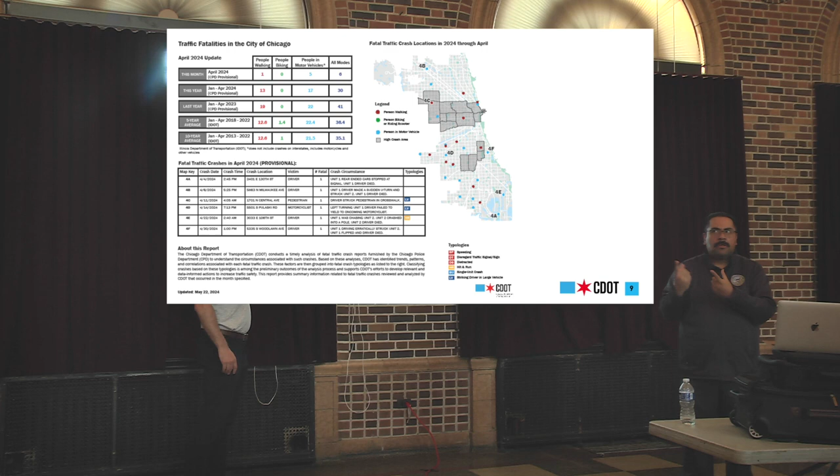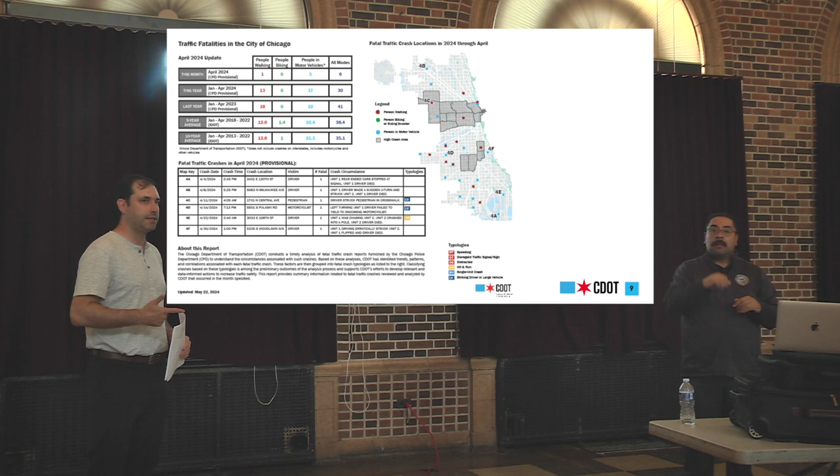This is something that, if you guys are interested, we post on a monthly basis. It's a recap of traffic fatalities around the city, mapping out where they're occurring, a brief description of what occurred in the crash, and then we assign these common crash typologies that we're seeing. So speeding being a huge one, disobeying traffic signals and stop signs, reckless driving, large vehicles is something we're watching very closely for a number of reasons.

So this information is posted monthly and I would encourage people to check it out. It's a really good resource.

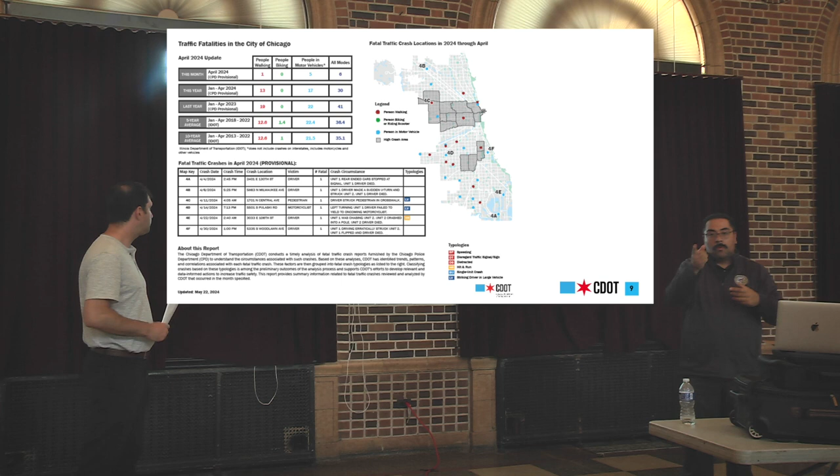Let's talk about a couple of projects. There's a really exciting project with CDOT, the community, and Alderwoman Scott on Independence Boulevard to install a new pathway system. The pathway is in place, basically around Polk and Taylor right now, and it's going to continue to be extended with additional landscaping and everything, but it's really an effort to activate the boulevard system, which is such a great asset within the community.

The Douglas Boulevard side has a really nice walking path that people can hang out on and enjoy, so that'll extend the path on Independence going north. And again, as I mentioned, that really complements and highlights the protected bike lanes that we installed on the boulevard system over the last couple of years.

So just a couple of photos. This is, like I said, between roughly Polk and Taylor right now, but this construction is going to continue on throughout the year.

Speaking of the boulevard system too, I'll plug our friend and partner Jonathan Kelly from the Lawndale Pop-Up Spot, who has done a really great job organizing community events and street closures on Douglas Boulevard. We've worked together with Alderwoman Scott to close down several blocks of Douglas Boulevard to car traffic and open it up to people to come out and celebrate.

This occurs - I know there was one last weekend, which sounds like it was really successful. There's going to be another 5 or so over the course of this summer. We're partnering together to close down the street to car traffic. This is occurring on Douglas between Central Park and Lawndale, in front of Stone Temple Church, and there's a lot of great community programming. If you're interested, talk to Jonathan in the blue shirt for all the dates.

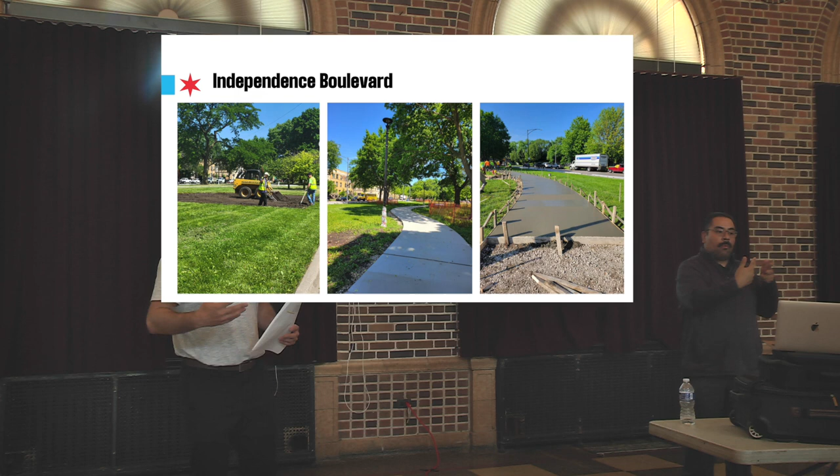I can't remember them offhand, but there's another 5 or so coming up. We've been doing this the last couple of years, and it's been incredibly successful - a great opportunity for people to come out and experience what our streets can be when not focused purely on moving automobile traffic, but really designed for people to enjoy the largest asset in the city, which is our public space.

The next one, Damen Green Line. This is under construction. I don't know the exact timing of when this is going to be completed, but this is a major rail transit project with a new station close to the United Center.

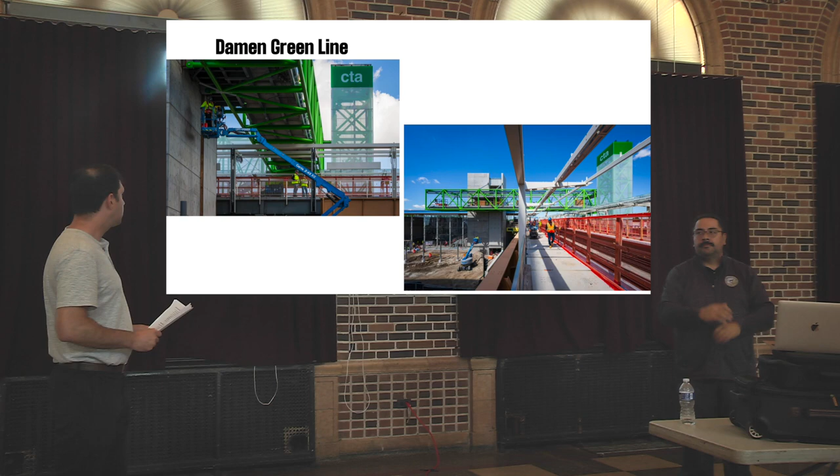Highlighting a really cool project that some of you may have heard about or been following: Chicago and Halsted is getting reconstructed starting later this year, early next year. We had a public information meeting last week where we presented a revised design that incorporated a lot of really cool elements, including dedicated transit lanes on Chicago Avenue through the Halsted intersection, to the east and west, linking up with existing bus lanes.

Also including some really nice bike improvements on Halsted, which I'll get to in a second. But in advance of that project, we actually started striping new dedicated transit lanes on Chicago, both east and west of Halsted, in the last couple of weeks. That work is ongoing and it'll finish up in the next couple of weeks.

Additionally, between Sangamon and Larrabee, right around Halsted, we're also in process, or just wrapping up, between Western and Grand in Humboldt Park. That'll extend the existing bus lanes from Ashland to Western, and continue going west to Grand. So basically from Grand to Michigan, we have some sort of dedicated transit lane - about 4 miles the whole way.

There's one exception, one gap between Ashland and Milwaukee, which we're working on and looking at in partnership with CTA, looking at that closely. That'll be coming along soon, but it's very exciting to see the Chicago Avenue corridor, which is a really important transit corridor for many people and communities, really making a lot of progress. We're very excited about that.

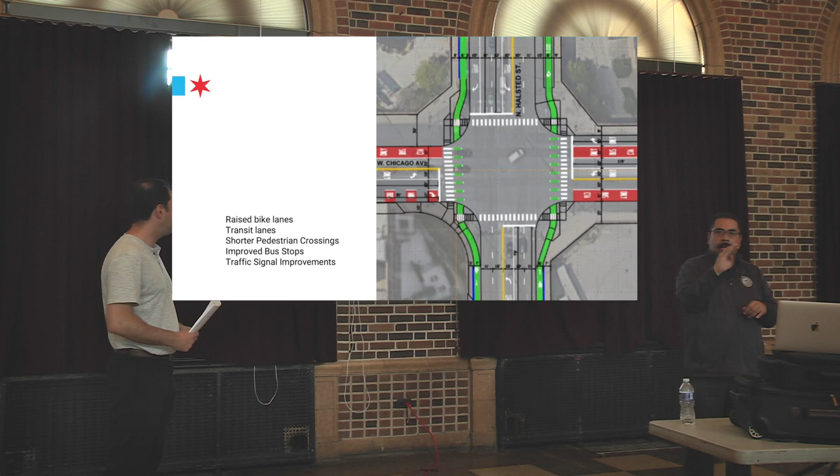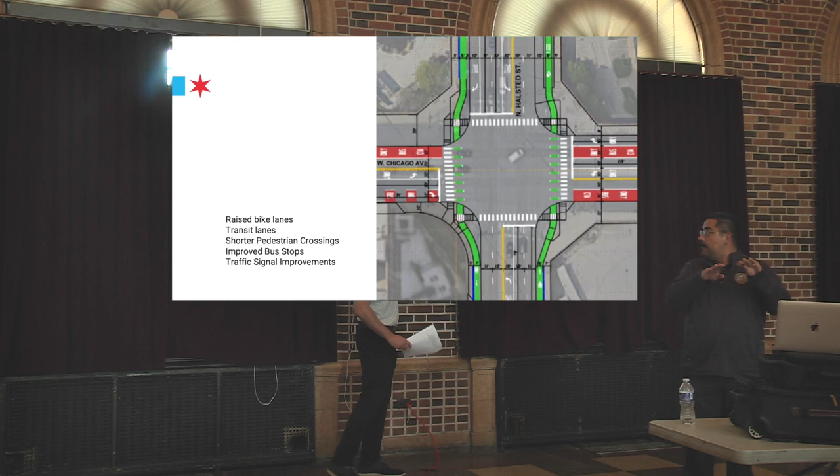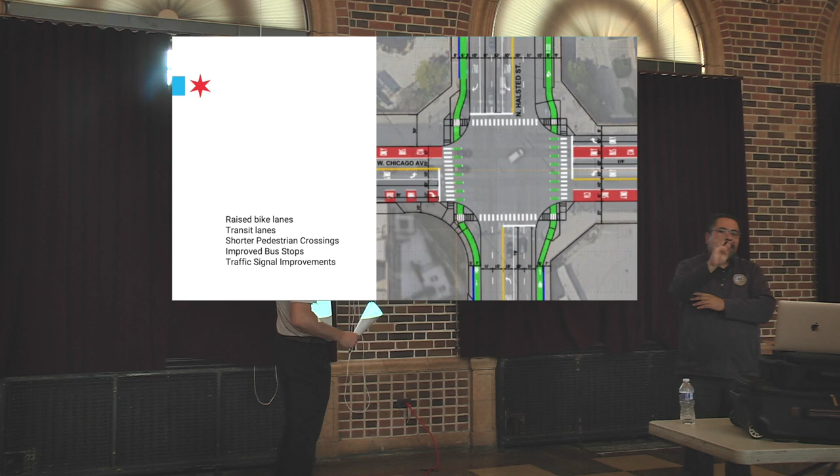At the intersection itself, the corners - it's a little hard to see here in the background, but these black lines will be the new design of the corners with the project. Here is the existing curb line on this intersection as an example. We're really shrinking the intersection, shortening the crossing distance for a pedestrian by 30 to 40%, slowing down right and left turns, which will make the intersection safer and more comfortable for everyone. I think the changing of the curb lines and shrinking of the intersection is really a huge benefit, particularly for people walking.

In addition to the elevated bike lanes, we've got some nice bus stops on Halsted - priority bus stops, where the bus stops in the travel lane.

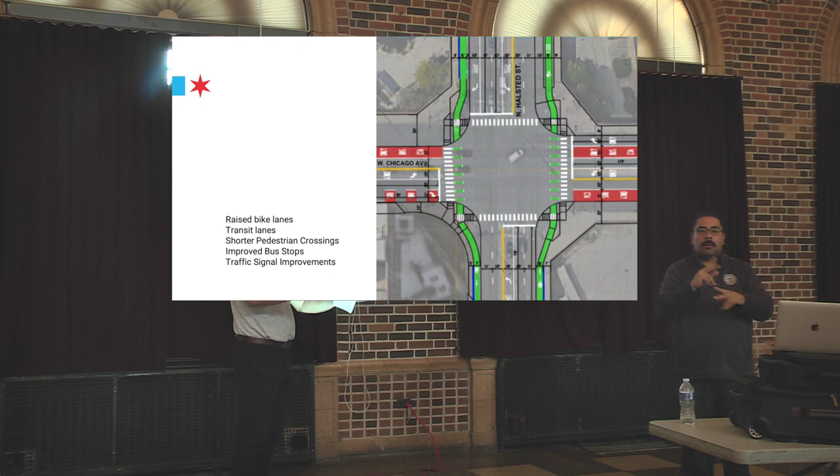The bike lane will be routed behind the bus stop, so there's no conflict from the bus pulling into the bike lane. Pedestrians have the sidewalk space, bike space, and then there'll be a space to get on and off the bus. This will make it easier for the bus to deploy the ramp, get people on and off who are in a wheelchair, stroller, that kind of thing.

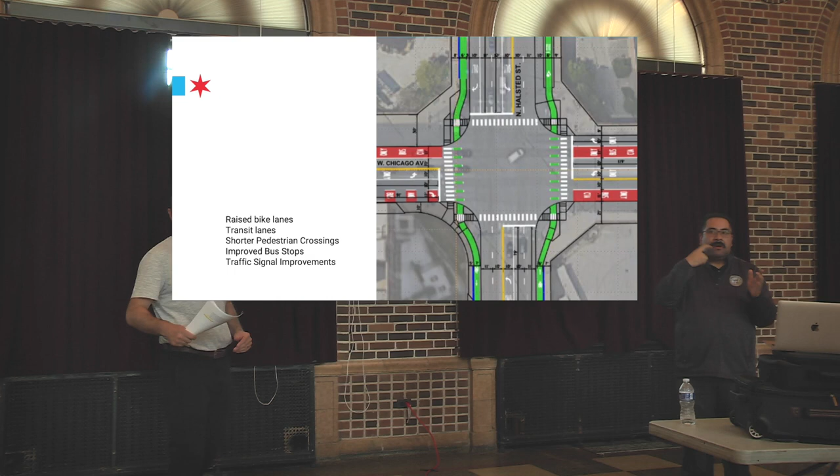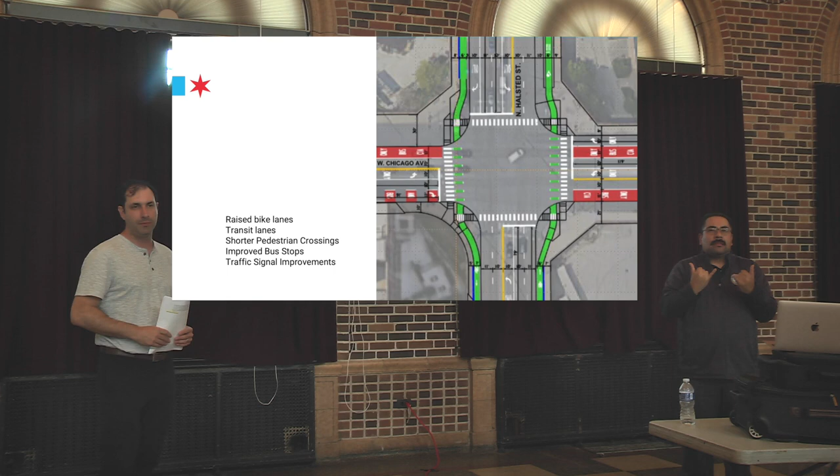So this is a very exciting project. It's been a long project. I definitely see a few faces here who have been very involved in the meetings, and really appreciate the partnership on this. Very excited where this is going. There'll be more info coming up over the course of the summer, but I think this is going to start late this year, more likely early next year in terms of construction.

I mentioned in the beginning some of the work we've done here in North Lawndale, but other communities as well, also South Lawndale, Little Village area, this neighborhood bike network process and strategy where we're working hand in hand with the community and sort of working backwards. Really the last thing we start talking about are streets. The first thing we start talking about is what's the perception, what's the culture around transportation, what are the barriers, what are the opportunities within the neighborhood, both physical barriers like a viaduct or sort of invisible barriers where really the only types of things that you would know are if you really are ingrained in the community and if you live here. We've really seen a lot of success with that effort.

The goal is to expand the tent, bring in people who are working on issues of public health, mental health, youth engagement, local businesses, economic development, sustainability, public safety, and really talk about and better understand the connection and relationship between biking, walking, transit, safe streets, and all these really important quality of life issues that are top of mind for people. When we talk about a protected bike lane or shortening the crossing distance at an intersection, it's not just about providing a couple feet of space for somebody to ride a bike or to get across the street, but it's about creating a community that is welcoming to everybody and achieving a larger set of goals.

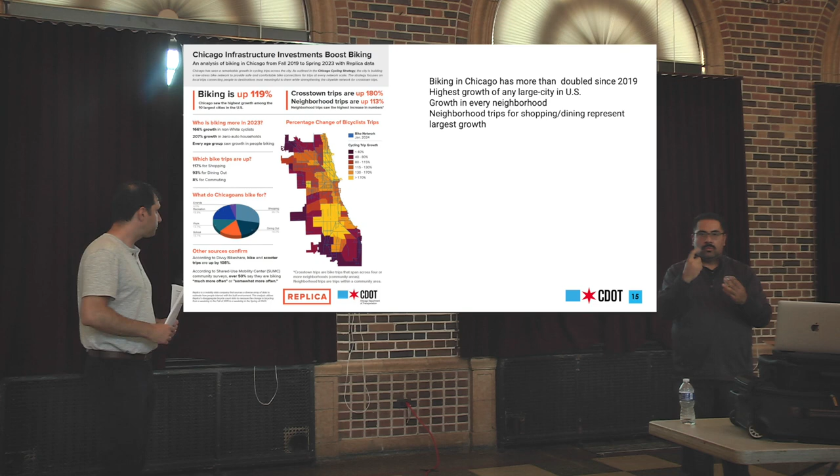So there's a really nice alignment between the strategy, partnerships, and the results we're seeing. The next slide shows a map for our neighborhood bike network process. We started this in North Lawndale, moved south into South Lawndale, Little Village, across Ogden, which Vanessa and Cody will talk about in a minute.

We've had a ton of really good installations in South Lawndale as well, with a few more planned and underway. We've continued that work across the Shipping Canal to the south in Brighton Park, McKinley Park, and Gage Park. Over the last 9 months to a year, we've worked closely with community partners in those neighborhoods to plan out the cycling network, and we have some very exciting installations we'll be announcing soon.

While I'm looking at this map, I'll also mention here in the 24th Ward, Saucedo Elementary School on 24th Boulevard, between Marshall and California—a very big elementary school with lots of kids walking to it. We worked with Alderwoman Scott and the principal of the school, and have some very exciting pedestrian and bike improvements happening. That's just getting started now.

We'll have raised crosswalks, pedestrian islands, and curb protected bike lanes. That's all under construction right now, just getting started. But it's a great improvement for the community and ties into a larger theme at CDOT that we're really focused on, which is improving accessibility and traffic safety around schools and parks.

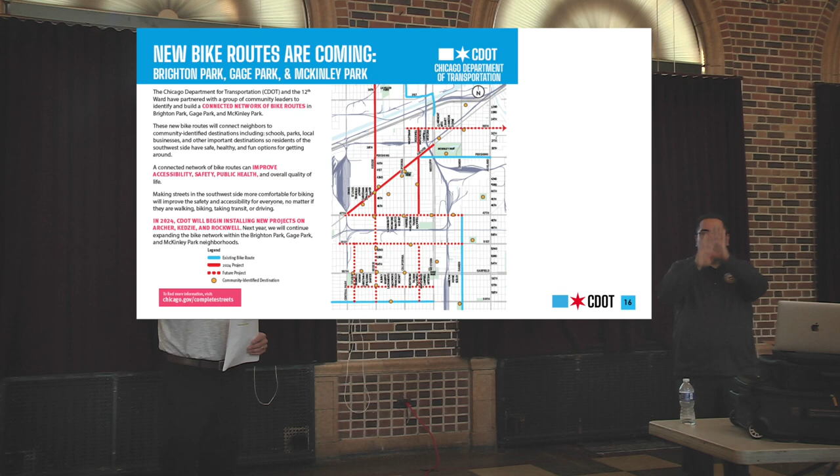We're doing that all over the city. We've got a lot of really cool improvements happening around Portage Park Elementary and Portage Park, including some raised crossings and pedestrian improvements. Nash Elementary in the West Garfield, Austin neighborhood off of Cicero, around Cicero and Erie. So that's a program we're continuing to develop, but schools and parks is really a focus of where we're going in the future.

Okay, next—I think this is my last slide, and there's so many updates and exciting things I want to share that I'm way over time. But if you have questions or want to chat, just grab me, I'll be here the whole time. There's just so many really cool projects and initiatives happening all across the city.

This is a couple of photos, this is Clark Street in the River North neighborhood downtown. We've got a protected bike lane under construction, plus pedestrian improvements, from Oak down to Grand right now—that's basically where Clark Street converts to a one-way street southbound. This is under construction as we speak: curb protected bike lanes, pedestrian refuge space, bike signals at some intersections. This should be completed in the next month or so, and will serve as a couplet to the Dearborn protected bike lane, which goes northbound north of Kinzie.

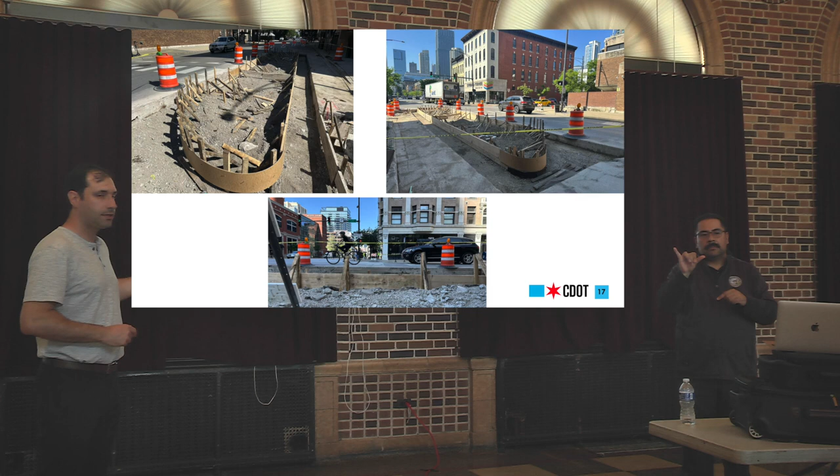So I think that's all. Again, thank you for being here. Look forward to the conversations at the tables, but really appreciate the partnerships with everyone. I think that's been really a key to the success we've been having and will continue to have in the coming years. So thank you.

Hi, good evening. How's everyone doing? Nice to see so many familiar faces. Hi, I know some of you. My name is Vanessa Irizarry.

I'm the project manager for the Ogden Avenue Corridor Improvements Project. My tendency is to lower my voice as we speak, so if you don't hear me, please let me know and I'll try to project better. I'm here with the managing project engineer, Cody Machen, from CDOT as well. We were asked to come here, so thank you for having us, to give a brief update on what we've done to date on the project.

We've had a lot of conversations with the community—a public meeting, 3 workshops, stakeholder meetings—so I will do my best at summarizing in 10 minutes. So we will try. First slide.

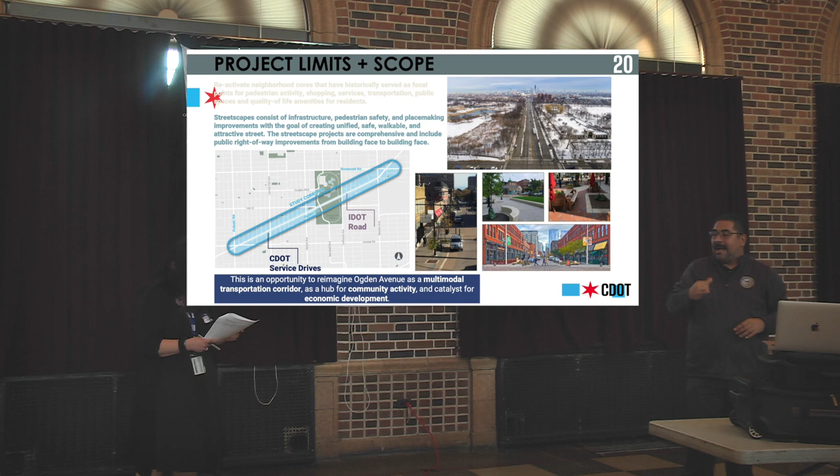With the goal of creating unified, safe, walkable, and attractive streets, the project is comprehensive and includes public right-of-way improvements from building face to building face. We include public outreach, placemaking, urban design strategy, concept design engineering, detailed design engineering, and construction as part of this effort. So it goes from concept development to construction.

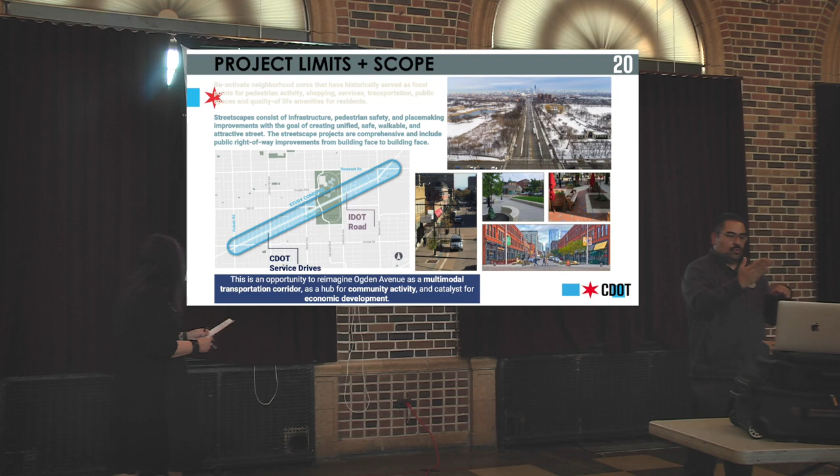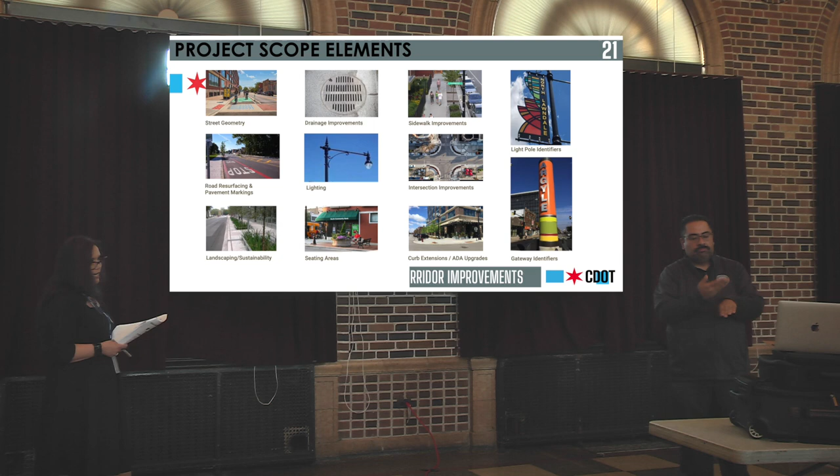Here you can see some of the scope within our project, which includes a variety of improvements, such as street geometry, drainage improvements, sidewalk improvements, road resurfacing, pavement markings, new lighting, landscaping, seating areas, curb extensions, intersection improvements, and corridor identity items such as light pole identifiers and gateway identifiers.

We want to recognize that the planning for this project is a continuation of the work that the North Lawndale community has been working on for a long time. The team wants to build on this work to develop the concepts and improvements, incorporating the input from the community on what they know to date. We want to acknowledge the 2018 NLCCC Quality of Life Plan. We've worked with Ms. Rochelle Jackson and many meetings for this project. This will have a strong influence on the project as we develop concepts and have our ongoing community engagement.

So we are early in the design process for the Ogden Avenue project. Right now, the team is focused on gathering community feedback and developing those initial concepts. Next slide.

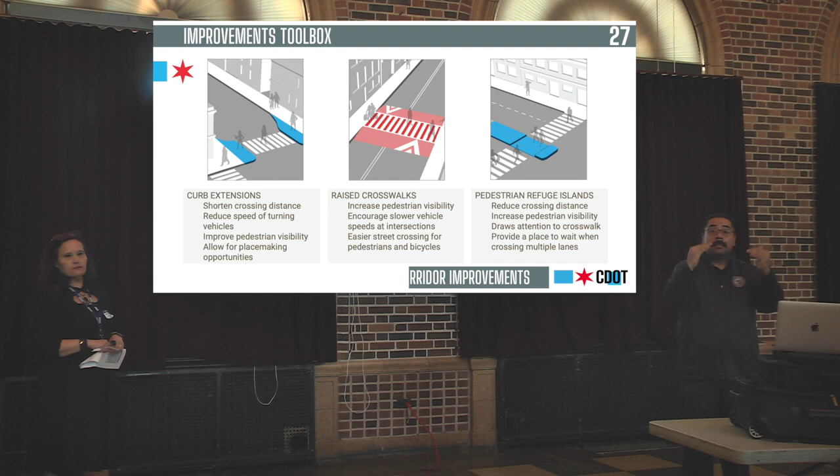So I won't get into a lot of this because I'm probably close to my 10 minutes. Stay tuned, some extra time. So we have a toolbox of safety features that we know we can implement along different corridors that will improve traffic, pedestrian, transit users, cyclists, and vehicular safety along the corridors.

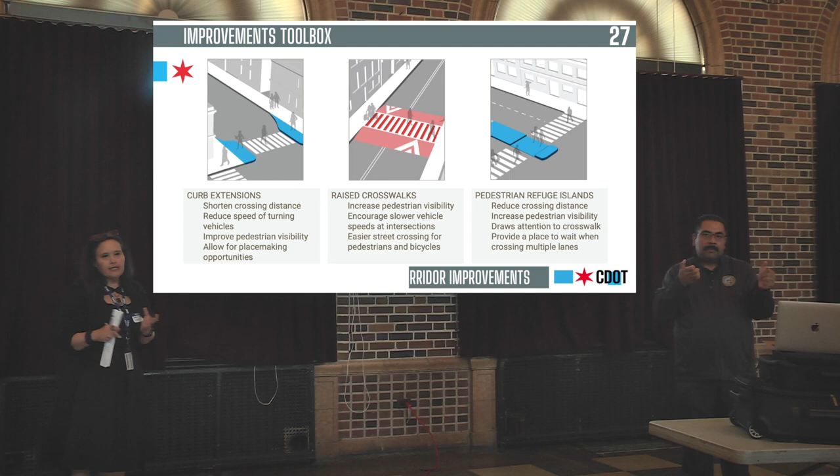And some of those that we are using for Ogden include curb extensions for shortening crossing distances, reducing speed of turning vehicles, improving pedestrian visibility, and that also allows for extra space for placemaking improvements.

Raised crosswalks to increase pedestrian visibility, and it does encourage slower vehicle movement at those intersections on the side streets, and it makes it easier for pedestrians and cyclists to cross, especially if you have a bicycle lane that's on the sidewalk.

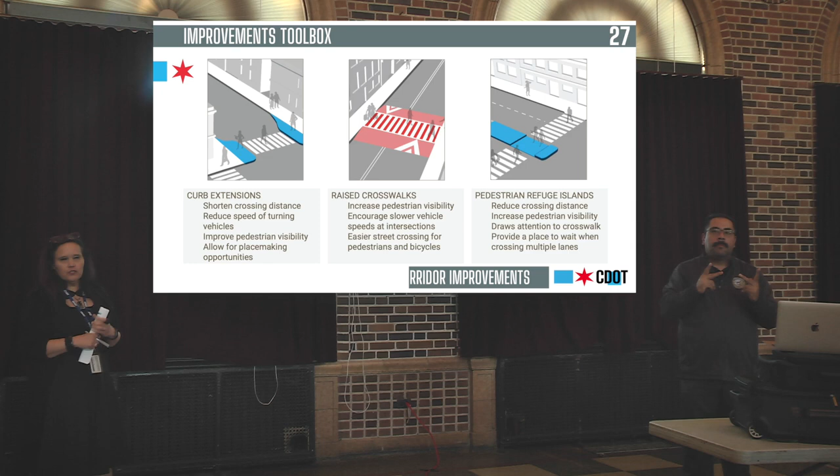Pedestrian refuge islands again provide a place for pedestrians to stop as they're crossing the street, and it shortens that distance. It draws attention to the crosswalk, and it provides a place for pedestrians to stop and wait for traffic to go by. Next slide.

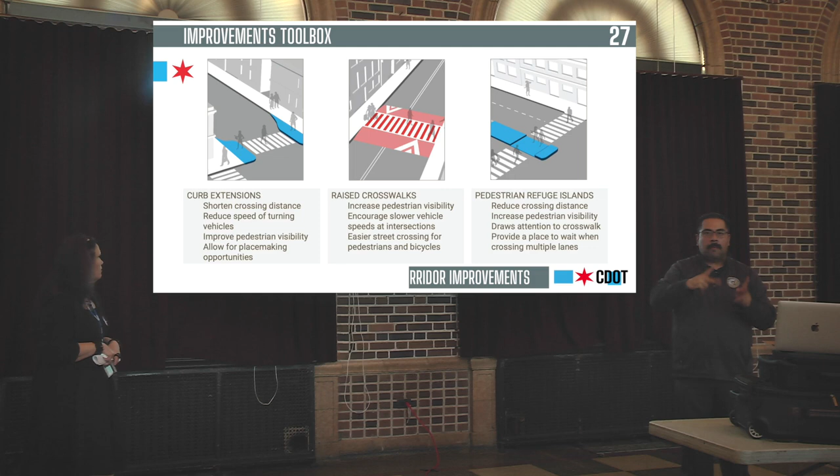Bike facilities: we're looking potentially at a raised, sidewalk-level bike facility that is separate from motorists. The thing about Ogden Avenue is that it's really wide, so we're trying to figure out what does that mean, how wide does it need to be for the traffic that's going through, and what are the opportunities for placemaking and spaces for the community. But there are limitations, like parking. The service drives do have parking, and some of that parking is needed, so we're trying to come up with a balance of what that means and what the community wants to see along Ogden.

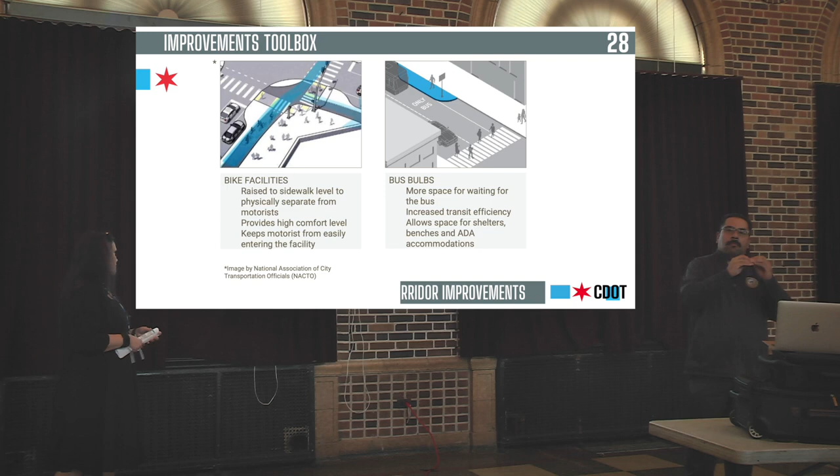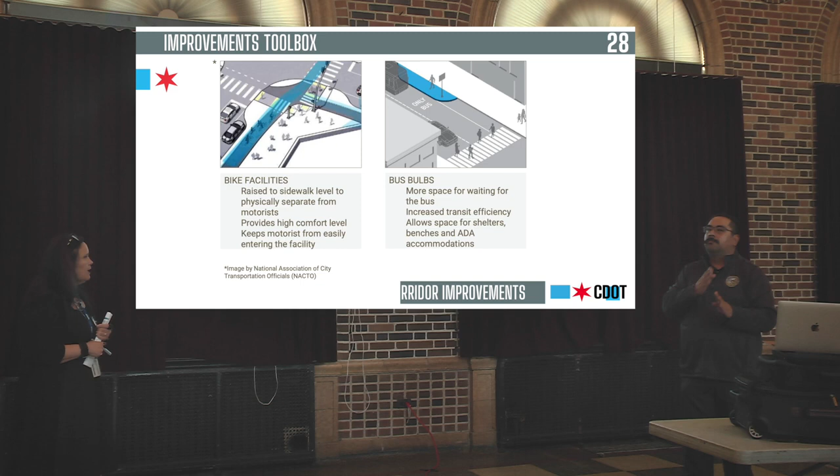Bike facilities on the sidewalk provide a high comfort level and of course keep motorists away from entering the bike lane. Bus bulbs will provide more space for waiting for the bus, increase transit efficiency, and allow for additional space for ADA accommodations and bus shelters.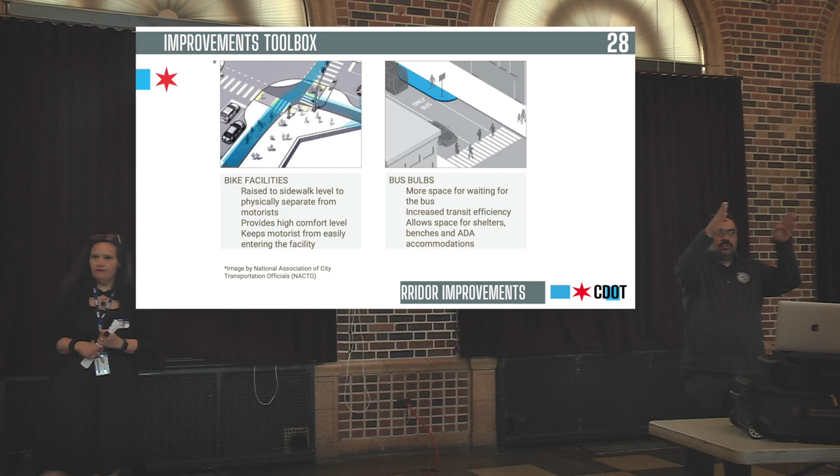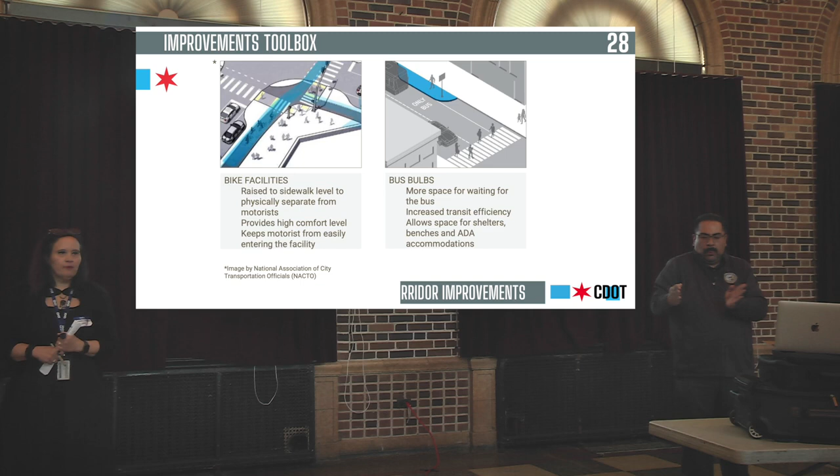I wish I had some pictures of Ogden, but if you're familiar with Ogden Avenue, most of the bus stops sit on the median, and the median is like 2 feet wide. So people are standing literally in the middle of what feels like a highway, waiting for the bus with nowhere to sit and almost nowhere to stand.

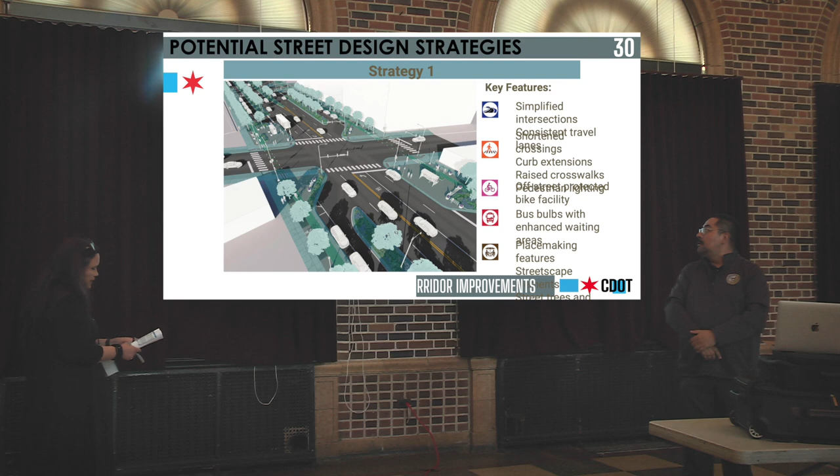So in the last workshop, we shared 2 concepts with the community, and we're going to call those Strategy 1 and Strategy 2. There were 2 potential baseline design strategies that we presented, and both strategies use the tools that I spoke about earlier, but they do have some key differences.

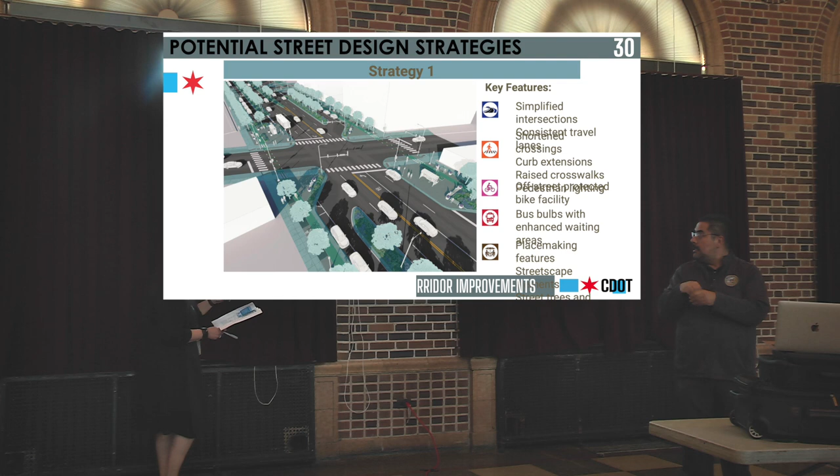Strategy 1, which is the one you see on the screen now, maintains parking within the service drives. It improves safety for all roadway users. It adds a row of trees in a furniture zone adjacent to the sidewalk.

And it provides a protected bike lane adjacent to the service drive parking. That's the green line you see right here. Under this strategy, service drives can be closed and repurposed on a case-by-case basis, depending on parking needs and adjacent land uses. Service drive closures at selected locations can provide additional sidewalk space for pedestrian use and open spaces.

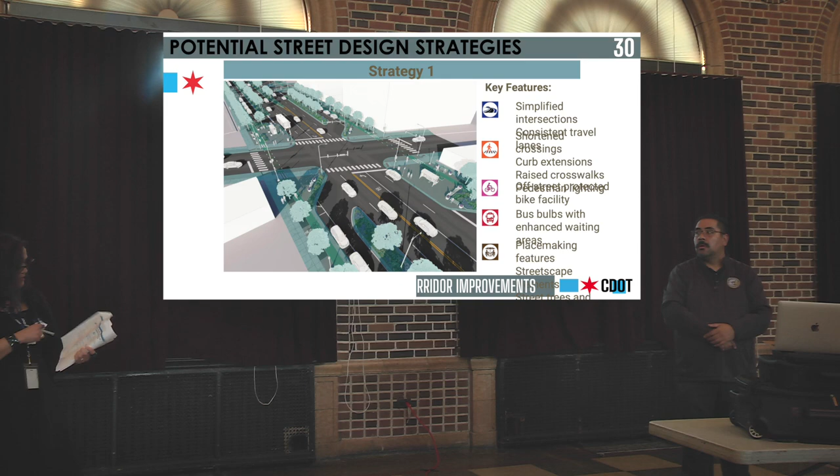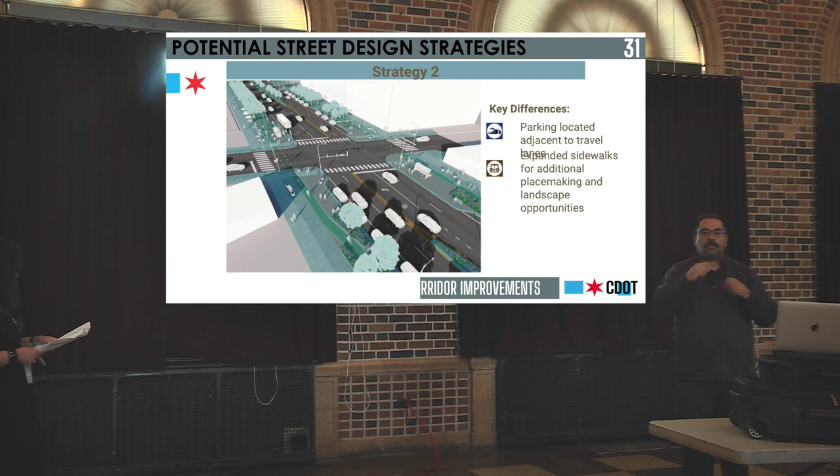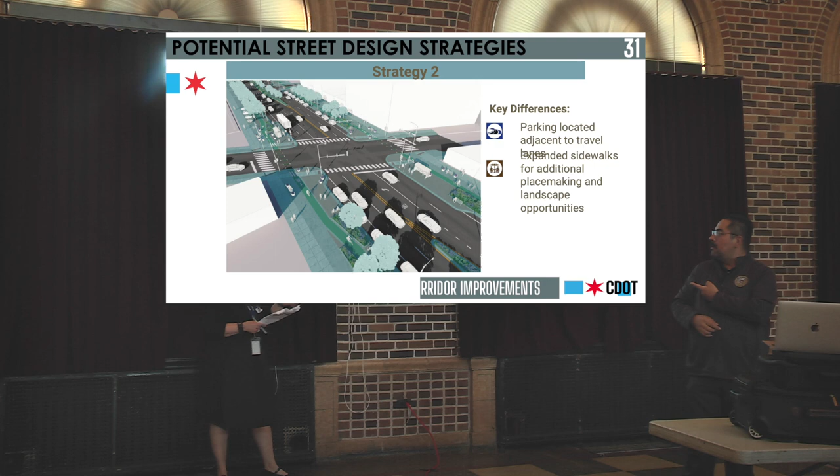Closing the service drives provides a wider landscaping zone and streetscape zone, as shown here, that could help activate the corridor, such as outdoor dining areas and public seating spaces.

The space also allows for a landscape buffer to be added between the parking lane and the furniture zone, and it allows for a double row of trees instead of a single line of trees as shown in strategy 1, to be installed on either side of the bike lane.

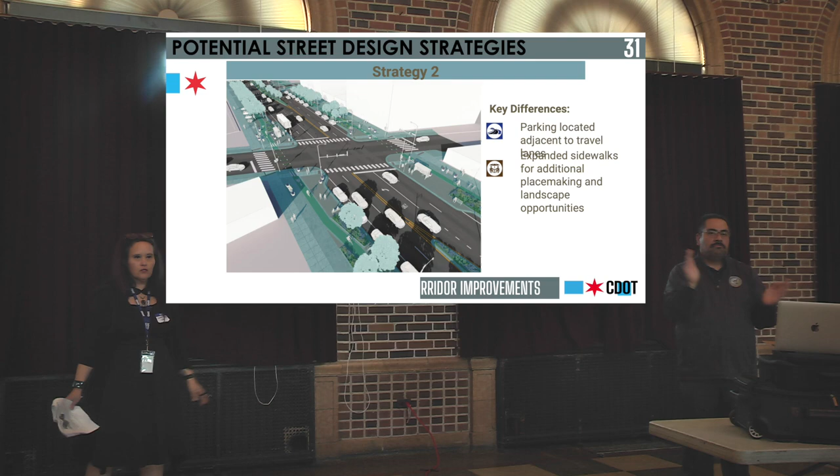The city will be looking to get more feedback from the North Lawndale community on the preferred strategies to develop and refine concepts. We're currently in those conversations with the community. There's a survey we'll be sending out to get additional feedback on which strategy the community prefers and how we balance all of these needs.